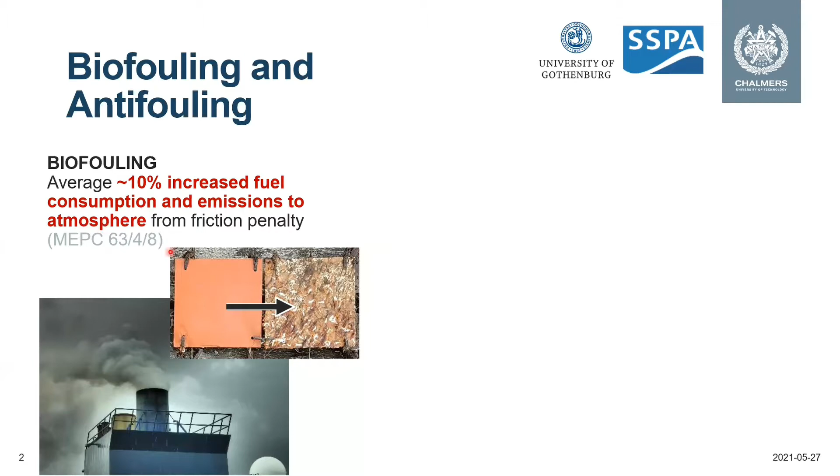When a vessel is staying idle for prolonged periods, a surface that was originally clean will eventually become fouled to a certain level. And what we mean by biofouling is any type of marine organisms that attach to the hull. On average, this leads to about 10% increased fuel consumption, or roughly the same in emissions to atmosphere, from a friction penalty resulting from a rough hull.

On the other hand, operators or ship owners will resort to applying an anti-fouling coating, which will gradually release biocides to the seawater or to the marine environment. And in the case of the Baltic Sea, this corresponds to a sizable amount of copper emitted yearly compared to the total input to the Baltic Sea.

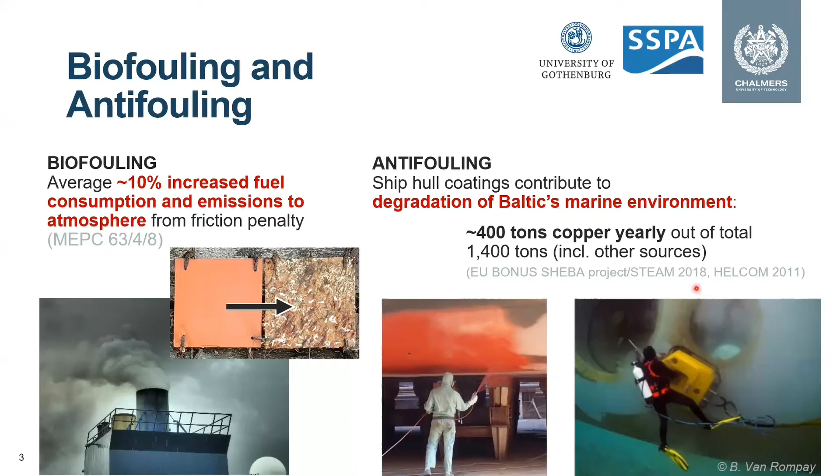This, of course, will inhibit the development of fouling, but it also has an impact on the water quality of harbors, especially in enclosed seas such as the Baltic Sea. Other options exist, such as in combination with coatings that do not have any anti-fouling properties, such as in-water cleaning. With this project that ran from 2019-2021, we have developed a decision support tool, which we call HullMASTER. I'll get into that in a while.

The team that has developed this has a broad expertise from environmental chemistry all the way to marine biology and naval architecture, to develop a cross-disciplinary tool that allows us to look into many different impacts from the maintenance of the hull and operation of vessels. And of course, I would like to acknowledge the shipping operators that have collaborated with us, offering us their data, which come from ro-paxes and tanker vessels.

So why develop a decision support tool? We developed this tool with the aim of filling the gap of having an independent source of recommendations for maintenance. We see that there are many sources of information for operators, and we would like to offer a scientific or evidence-based approach to the problem of selecting the best strategy.

What we mean by strategies here is different types of coatings that are available, as well as different types of in-water maintenance or even dry docking maintenance scheduling, but that's a little more difficult to control. And depending on the vessel case, the operational profile and routes, these recommendations will be tailored to a specific vessel or specific operation profile.

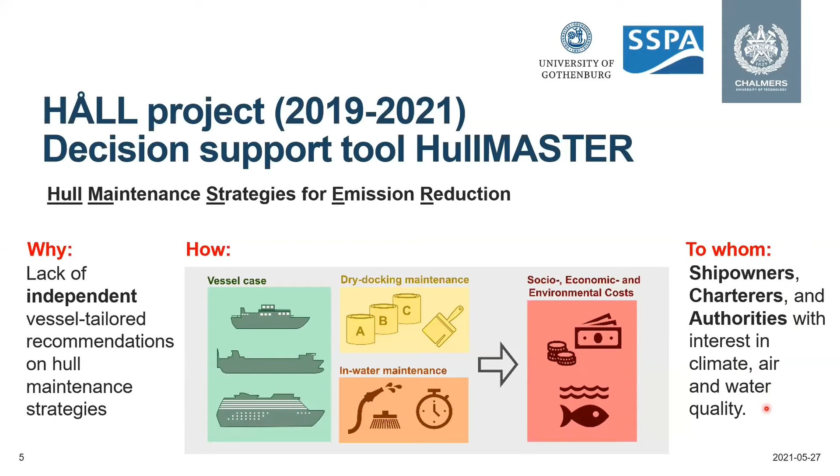The tool is developed as a standalone program for Windows, where a ship owner or any interested party can go in and define the vessel specifications. This is the input part. The output part is a cost difference compared to a business as usual scenario. This business as usual is the conventional approach of using a biocidal anti-fouling coating, emitting copper and other biocides.

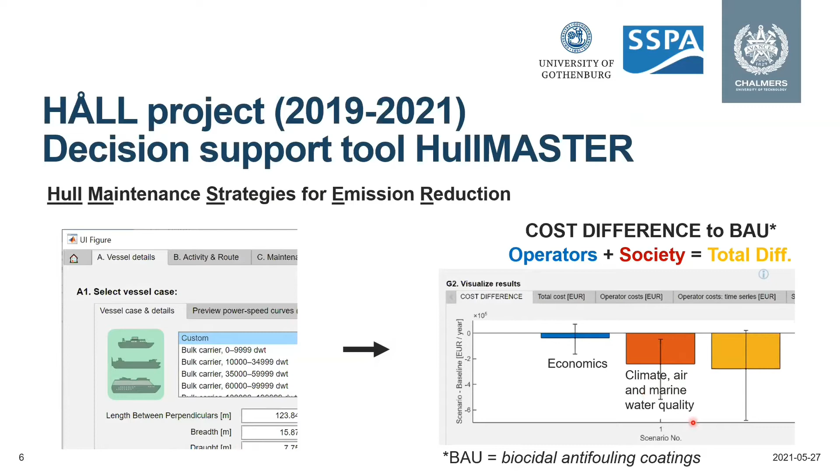The data sources for our models include the field testing of coatings. In this specific case for this tool, we have collected data for the Baltic Sea region and also relied on previous coating tests that have been provided along the years from other studies.

Besides this, we have from the coating side the emissions from the coatings. We have data provided by field measurements using an XRF, or X-ray device, to determine how much biocides are being emitted from the coatings, and so we can account for that for different seawater conditions.

It's important to mention also the pricing part, where we collaborated with industry partners to estimate the pricing for the region we are looking at, which is the Baltic Sea region at the moment. Of course, these pricing estimates can be manually changed by the user if better, more accurate pricing estimates are available.

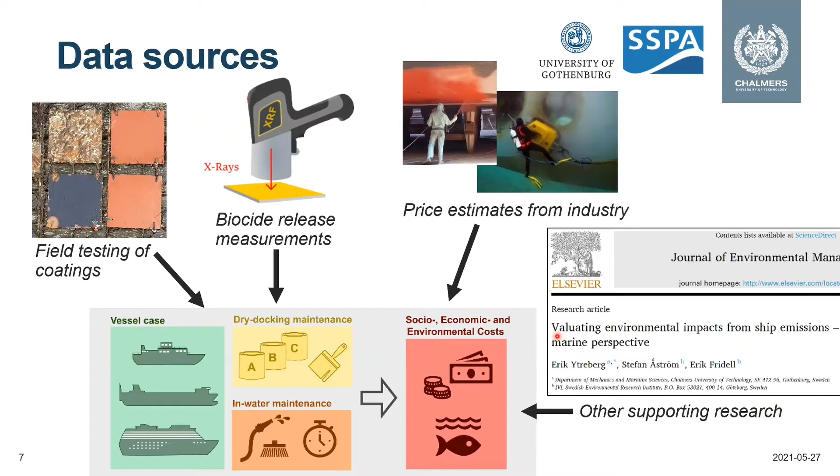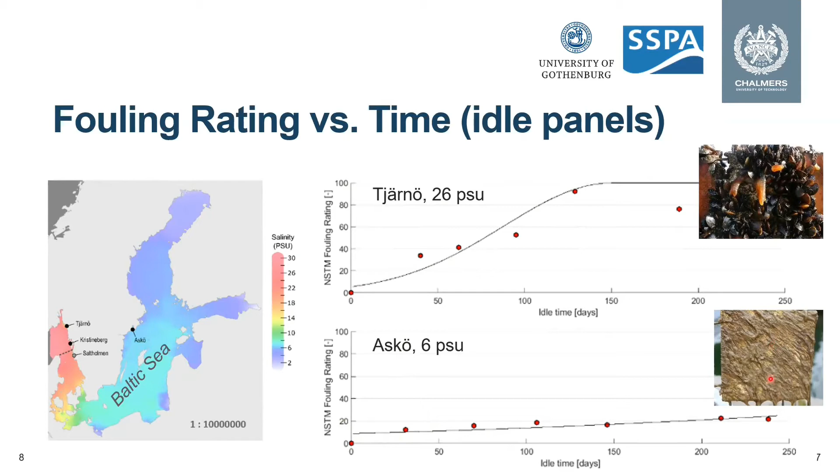And as you see here, for high salinity, fouling develops much quicker, reaching the highest level already at around 150 to 250 days. And here's an example photo of how that looks. For low salinity, fouling develops much slower, reaching barely a level of 20, which corresponds to soft fouling or filamentous fouling developed on that surface.

Also comparing different coatings, what we looked at here was an inert coating. And if you look then, of course, for a copper coating, as expected, we have a much better performance where we only have slime. But surprisingly, even a foul release coating with no biocides seems to work quite fine even under idle conditions, at a comparable level to an anti-fouling coating.

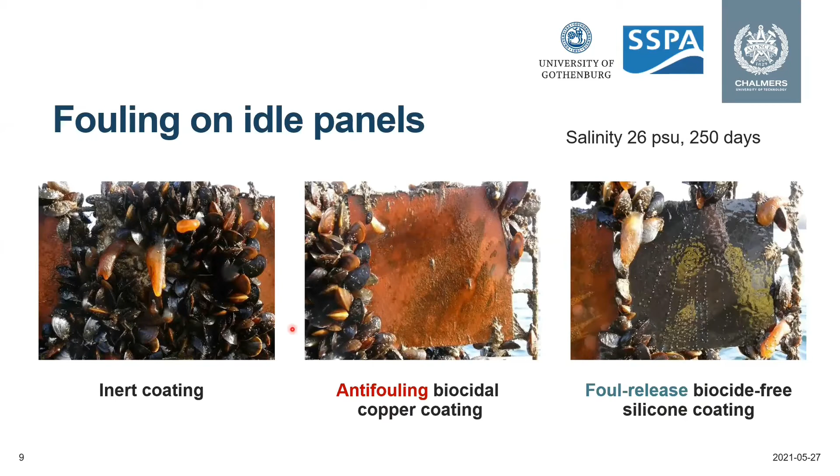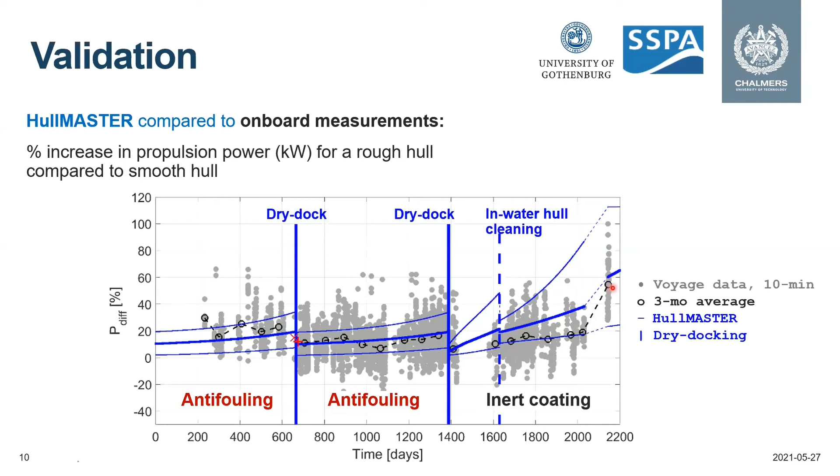In the case of this specific vessel, we changed to an inert coating, where we see a rapid increase in powering penalty at the end of this period, which was due to a prolonged idle period. And this is well represented in the predictions from HullMASTER, to a level of up to 60% penalty in this very extreme case.

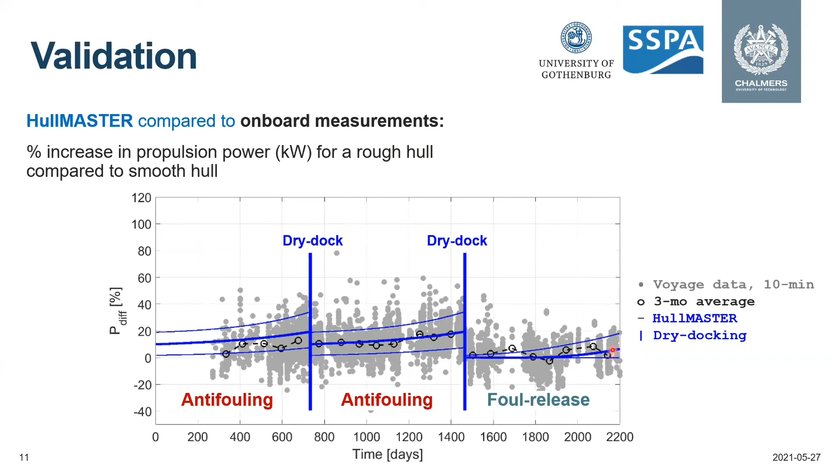We have other coatings that seem to perform better, and again, this confirms what we have from our field testing of different coatings: the foul release coating contributed to an immediate decrease in the penalty to almost smooth level. And I should remind again, this is a rough hull compared to a smooth hull, with a slow increase towards the last period. This correlates quite well with what we see in the field, with foul release coatings performing either similarly or better than copper coatings.

And this type of validation we have performed for 9 vessels, or over our almost 40 vessel years of data, and by comparing the predicted power penalty against measured penalties, we see that these points match in about 85% of the cases when we compare 3-month averages before and after maintenance and consider their statistical significance, represented here by error bars as 95% confidence intervals. These results will be presented in more detail in the HullPIC conference this year.

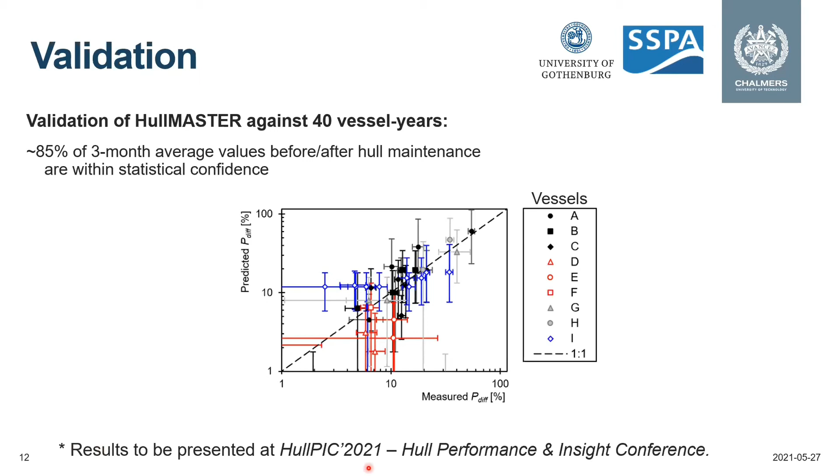An application example, our suggestion of how this tool could be useful, is looking here at operator costs for different coating types. We can then compare the cumulative costs for operators, or this could be seen as the total cost of maintenance and bunker over a long time. And we see that we can compare different coatings and see when a break-even point happens in time.

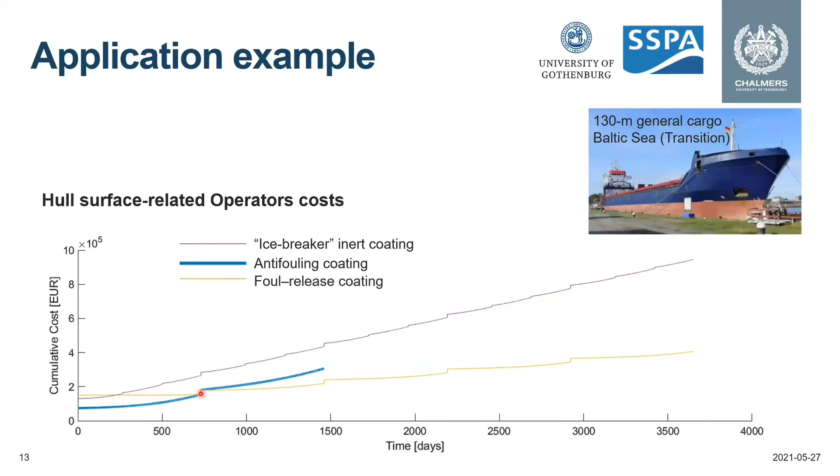On the other hand, we can compare the totals and see how much we can save, or in this case, how much can be assigned to a bunker penalty, how much can be assigned to maintenance costs, and then we can see where the savings can be made, if there are any savings to be made in a certain comparison.

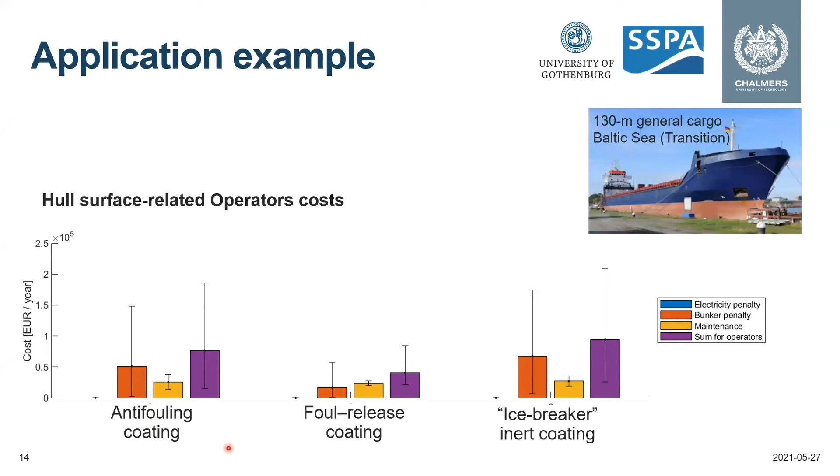This is just an example for a 130-meter general cargo, and of course these values will vary depending on many parameters. And the point with this application example is just to showcase how the tool can be used. So don't pay too much attention to specific absolute values at this point, just as an example case.

For the societal costs, we have assumed different emission factors for emissions to air based on previous literature and depending on specific engine parameters. But also then we can relate that to the powering penalty, and most importantly to retain from this plot is just that we have a list of different emissions that we consider, and in this case it seems that the zinc and copper, so the biocidal emissions, stand out in this plot, and when we move on to biocide-free coatings, those of course will be reduced to zero.

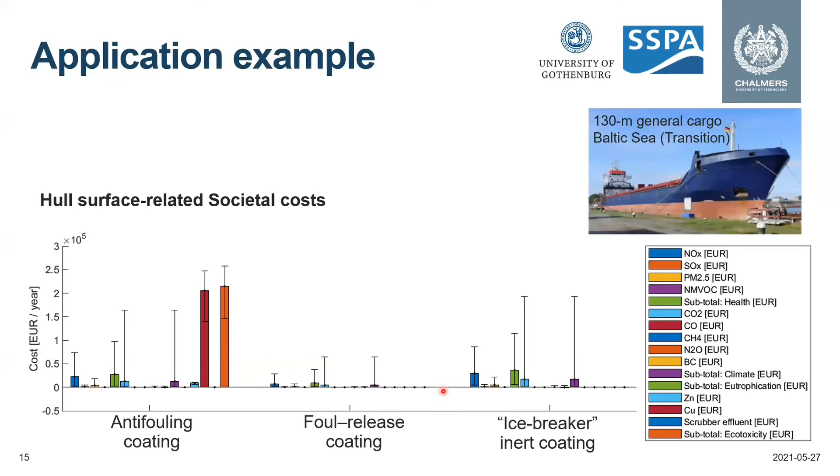In a comparison between coatings, we have here a comparison between the foul release case and the icebreaker inert coating, and both of them are compared to the baseline case of a biocidal antifouling coating. And what we see here is a significant saving per year for the society and environment when moving from an antifouling coating to a foul release coating, or when moving from an antifouling coating to an icebreaker coating, with marginal savings. And I say marginal because the confidence intervals given by the error bars are still quite significant in this case. Marginal savings or marginal expenditure from the operators to give a certain environmental and societal benefit.

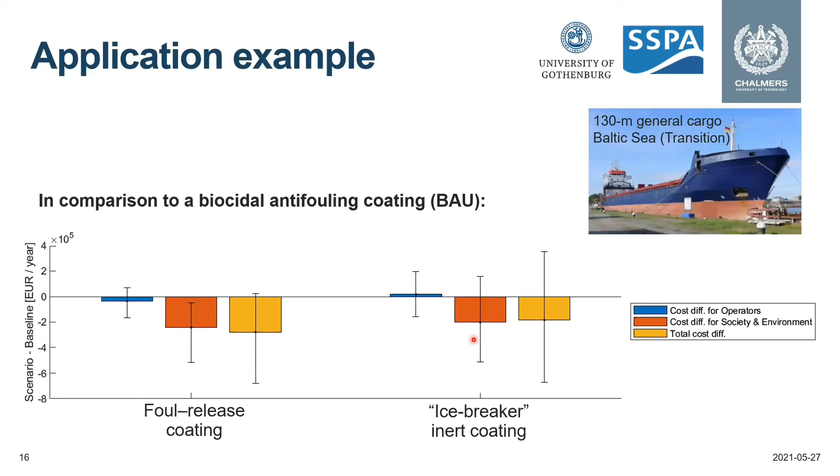So as a conclusion to this brief introduction to HullMASTER, we would like to point out that we have developed a tool that is interactive and can be tailored to different vessel cases and operational profiles, and that accounts for both economic and societal costs, where the societal costs include the air quality aspect, impact on health, and the marine environment. The validation against vessel performance from our onboard data shows about 85% agreement for those vessels we have tested in the Baltic Sea and transition to North Sea.

Of course, the foul release coatings look promising, but there are still gaps in terms of ecotoxicity. That means the impact on the marine environment of these coatings needs to be further investigated, as well as applicability to other vessel types where foul release coatings might not be suitable.

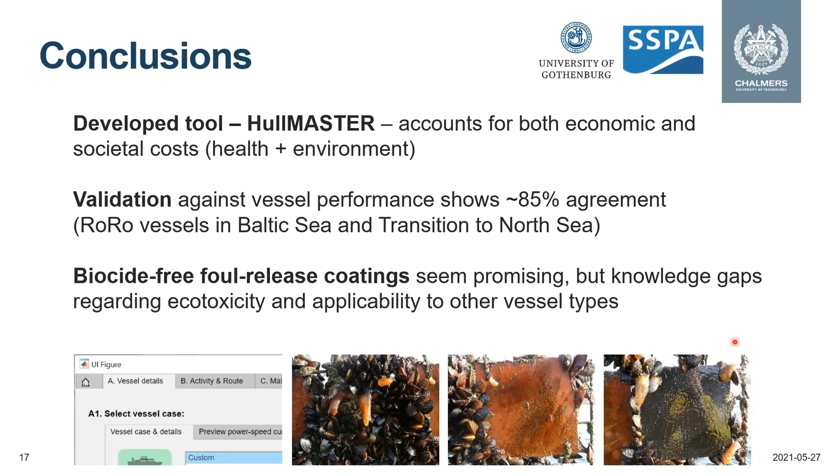As future work, we would like to point out a few items that we think are worth looking into, and that is, of course, to continue the communication with shipping operators and even organize workshops where they can have a hands-on with the tool. Then we think of utilizing the output for improving the existing environmental scoring systems, or coming up with recommendations for best practice for different vessel segments, and importantly, extending the tool beyond the Baltic and North Sea. Of course, that will require that we add data for other regions outside our current working area.

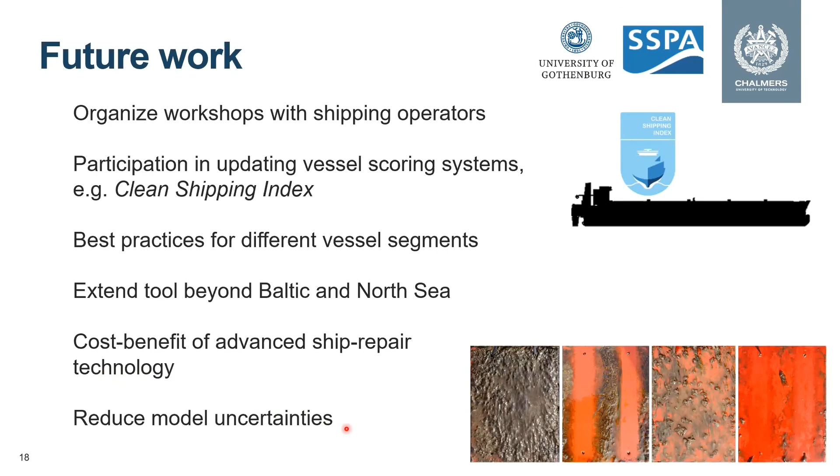And then we can look at other cost-benefit analyses for new technologies that come up, and reducing model uncertainties is of course important to be more confident that we will have such savings or benefits for the environment. I would like then to thank you for your attention.